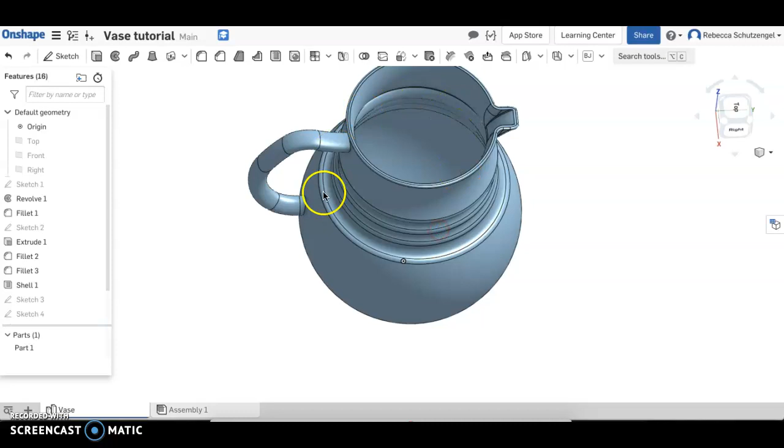In this tutorial, you're going to make the vase that you see on the screen, and that's going to allow you to practice a lot of the Onshape commands you've recently learned. Specifically, we're going to use a revolve command to create the main body of the vase, an extrude to create the spout, a sweep to create the handle, and a shell to make the vase actually hollow the way you'd expect a vase to be. You're also going to learn a new command called delete face.

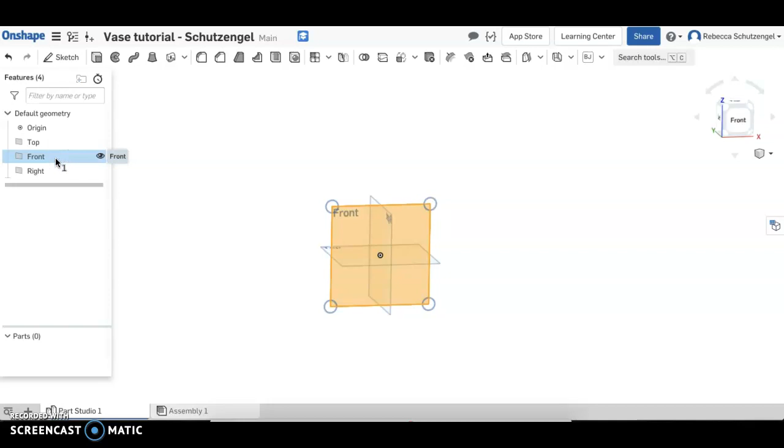So starting from a blank document, notice I named mine Vase Tutorial and then my name, and you should do the same in your document. I'm going to make my first sketch for the main body of the vase on the front plane. If I select front plane before clicking sketch, notice how the sketch plane is already selected as the front plane because that's what was highlighted. And then I'm going to click P on my keyboard to hide all of the planes, and click on the view cube so I'm looking head on at the front plane.

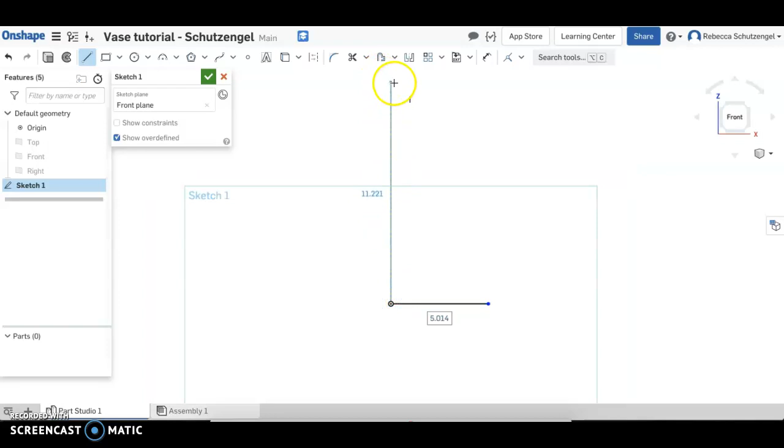When I sketch the outline that I'm going to revolve, I'm only going to sketch half of the vase's shape, because when I revolve that half of the shape 360 degrees around, I get the entire thing. I'm going to start by drawing a few lines, starting lined up horizontally with the origin. I'll draw a horizontal line, then a vertical line, then another horizontal line, making sure each of those constraints snaps as I am drawing the line in.

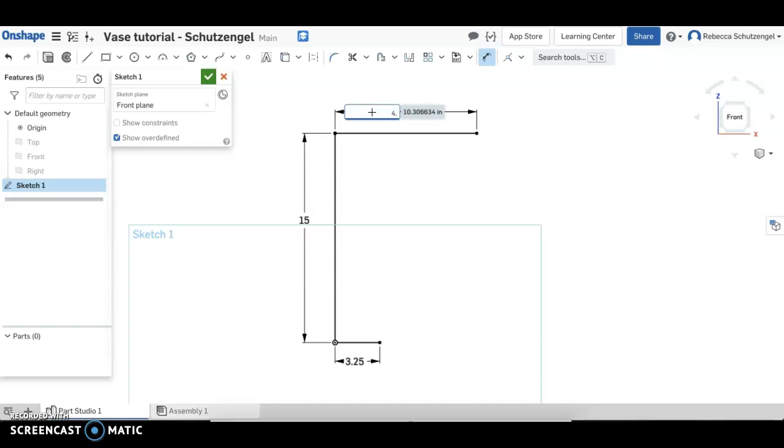And then I'm going to start to put some dimensions in. This vertical dimension is going to be 15. This bottom line is going to be 3.25. And this top line is going to be 4.375. Then to get the rest of the outline of the vase, I'm going to use a lot of 3-point arcs - A is the shortcut on my keyboard.

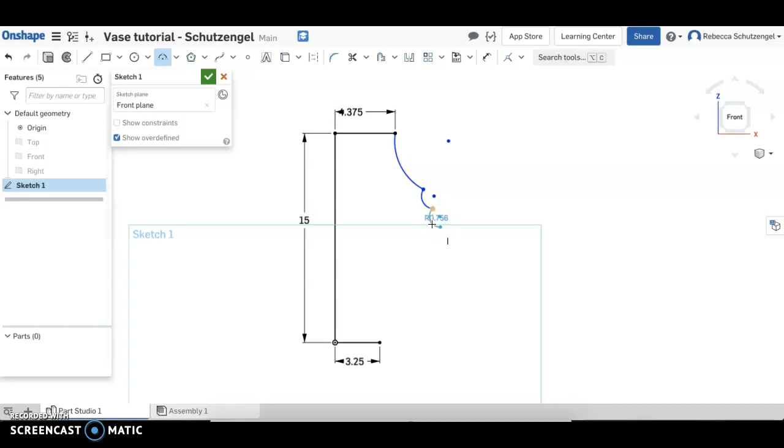At first, I'm just going to very roughly draw those arcs in, sort of vaguely where I want them. Then I'm going to put in a bunch of different constraints and dimensions to get the whole thing to be fully constrained as a sketch.

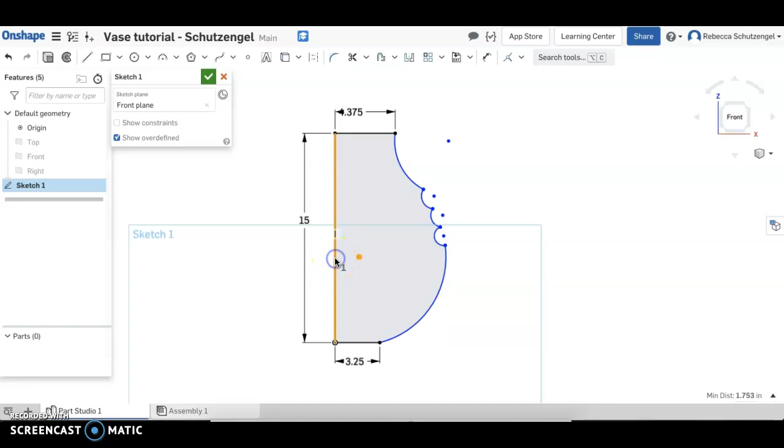Okay, so now I've got those 5 arcs, and now we're going to start with the constraints. The first constraint, this bottom arc right here - this is the center point of that arc, and I want it to be constrained to be coincident with that line, so the center point is on the line. The keyboard shortcut I just used was I for coincident.

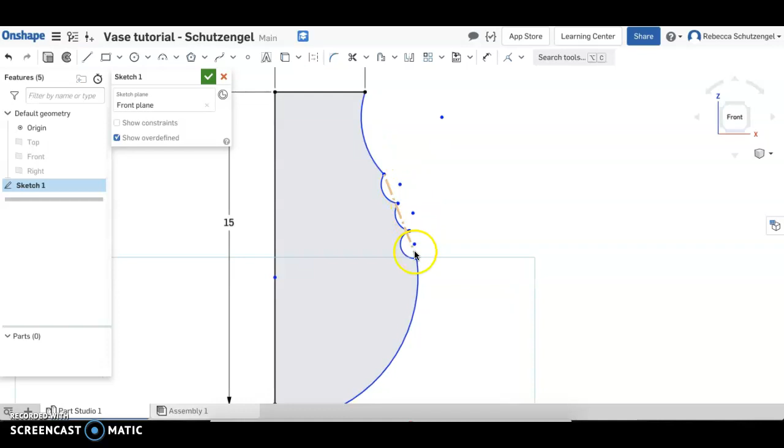Next, I'm going to create a construction line. I can press L on my keyboard to get a line, and then Q to make it a construction line. Then I'm going to draw it from here to here. The reason I want that construction line is that I'm going to make each of these points, which are the centers of the 3 small arcs, to be coincident with that construction line.

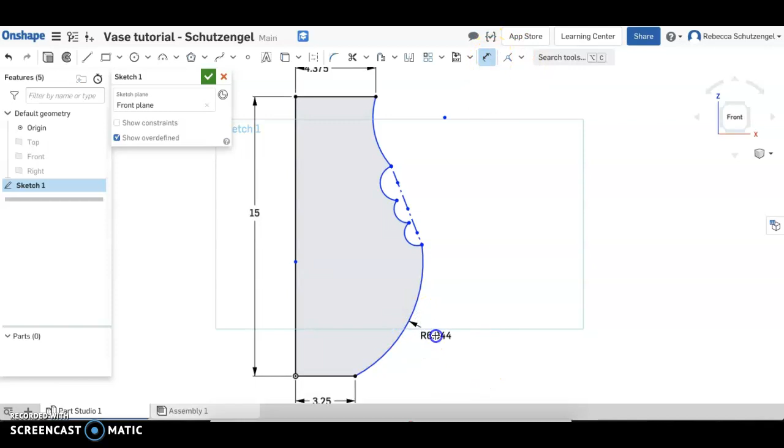Now I'm going to start putting in radii for some of the arcs that I drew as dimensions. Again, D on my keyboard to select the dimension tool. This bottom arc, I want it to be 6.3. This top arc, the radius is going to be 3.4.

Then I'm going to start putting in some lengths as well. I'm going to constrain the heights of a lot of these arcs. So from the top here to where this first arc ends, I want that height to be 3.5.

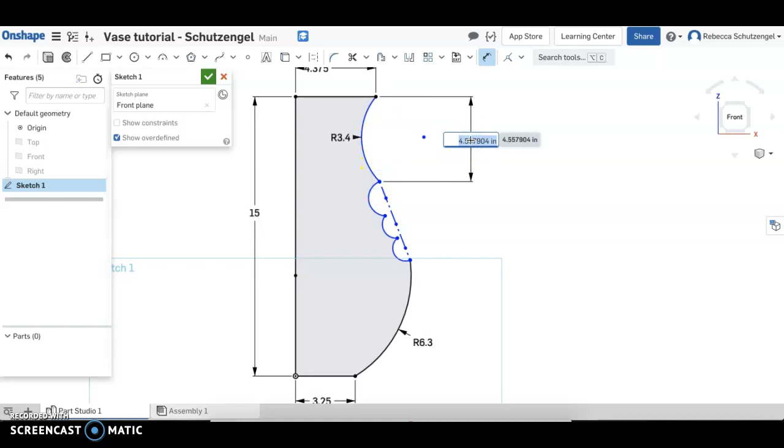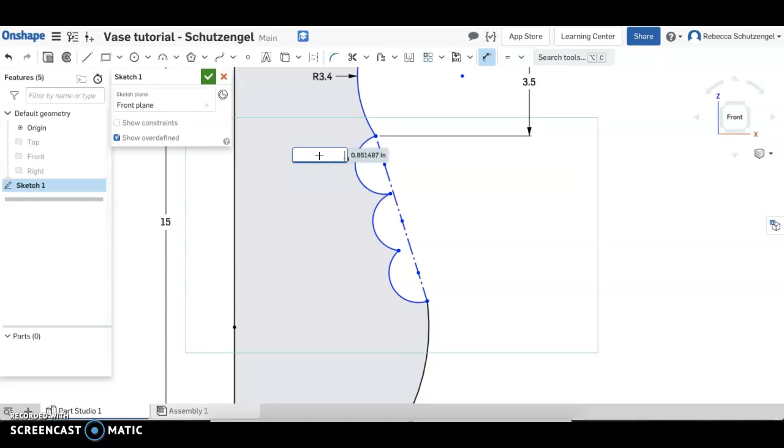Notice these 3 small arcs are now doing some weird things, so I'm going to start to constrain them more as well. I'll click on all 3 arcs, and those 3 arcs I want them to be equal sizes - E on my keyboard to put in the equal constraint. Then I can dimension just one of them, I want it to be 0.5, and that will make all 3 of them 0.5 automatically.

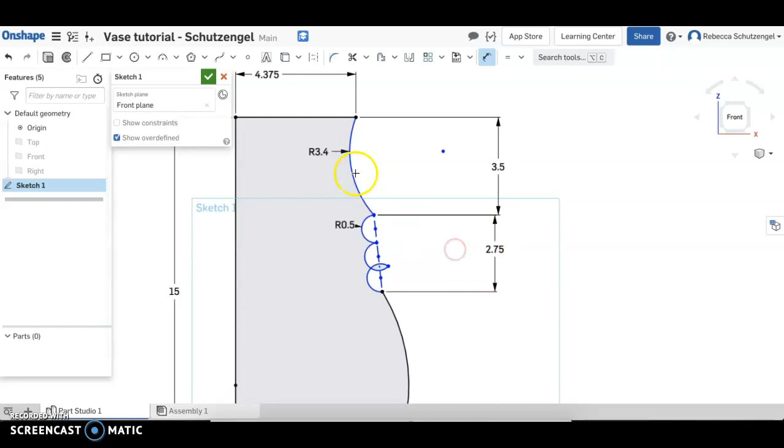Then I'm going to do another length from there to there - that is going to be 2.5. Oh sorry, this is actually going to be 2.75. Then going back to this top arc, this center point for it, I want from the top of the vase to that center point, that height is going to be 1.5, which now makes this arc fully constrained.

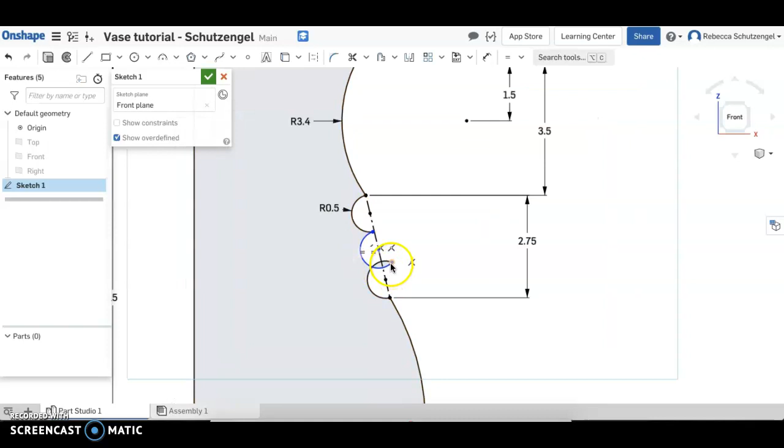The only thing that's not constrained is that small one in the middle there. First, we have this sort of weird overlapping thing happening, so I'm just going to drag the arcs that I have until that is no longer happening. Then I just need one more dimension - I'm going to go from here to here vertically and make that 0.98. Now the entire thing is fully constrained.

My whole sketch is black, as you can see. And here you can see all the dimensions if you still need to put any of them in your own sketch.

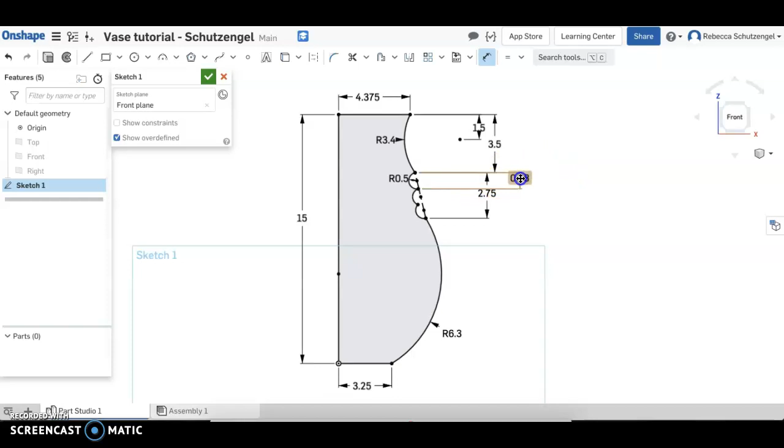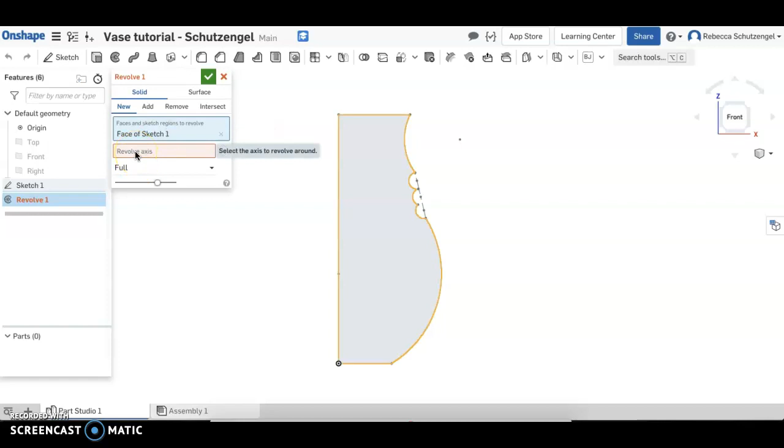Sketch 1 is done, and now I need to revolve it. Just like I could select a plane before I click sketch, I can select a sketch before I click revolve. Notice how because I had the sketch selected, it's already in here as the sketch region to revolve. The only thing I need to select is the revolve axis, so I'm going to click on revolve axis, and I want this shape to rotate around this center line right here. I'll click that axis, and up comes the preview of my revolve.

Looks exactly like I want it to. I'm making a new part, and it is solid, so I'll click check on that revolve. That revolve is the main body of my vase, so I'm going to go ahead and name it that so I can keep track of the different features in my feature tree.

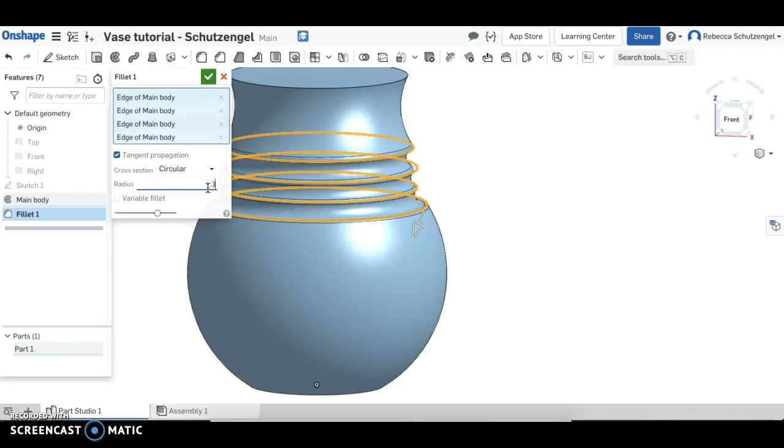Notice how I have some really sharp edges right here. I really don't want that, so I'm going to use the fillet tool to round all of those edges out. I'll select fillet, then click each of these lines where there's a sharp edge, and change the radius to 0.3. Then click check on that fillet, and again rename it to be more descriptive.

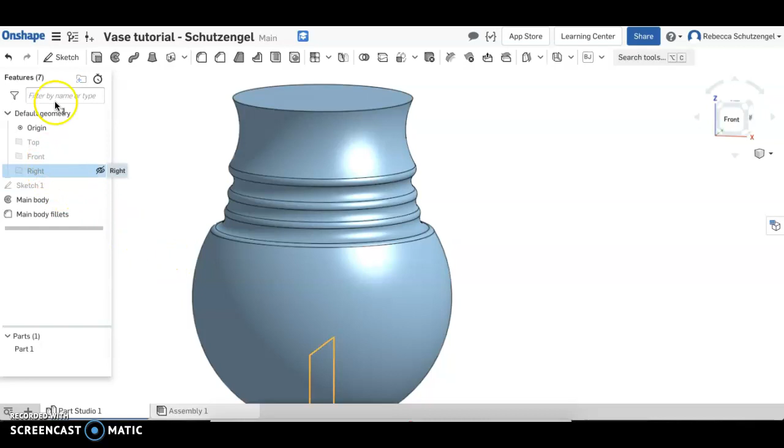Now I'm ready to start making the spout. I'm going to sketch the spout on the right plane and create my sketch, then rotate my view and click on the right side of the view cube. To get the spout to line up with the top of the vase, I'm going to use or project that line, just clicking on the very top here of the revolve that I have, and then the project command to get a line in my new sketch.

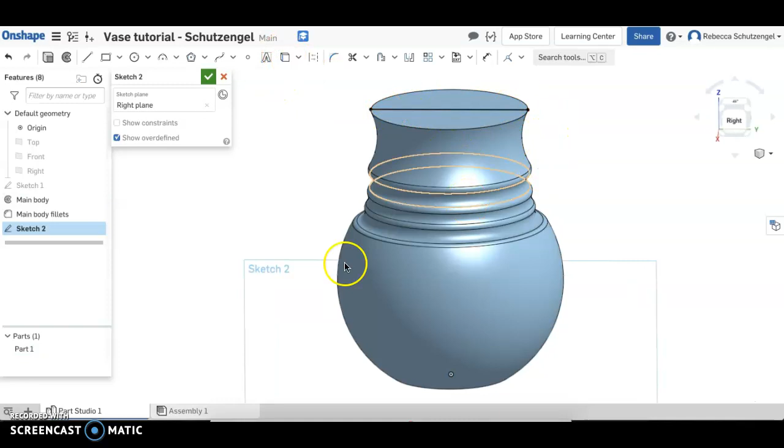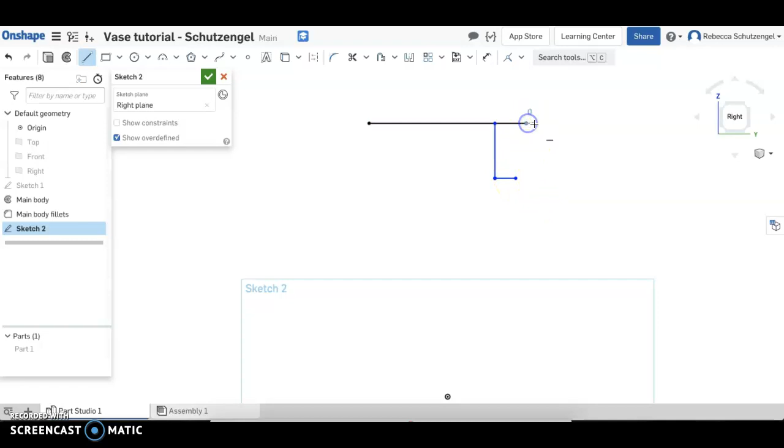Once I have that line, I really don't want to see the rest of my part for now. It's going to make it easier to do the sketch on a blank slate. So I'm going to start drawing the shape of my spout: starting from here, a vertical line down, a horizontal line over, and then another horizontal line extending out past where the edge of the vase is, and then a 3-point arc connecting those two spots, just like that.

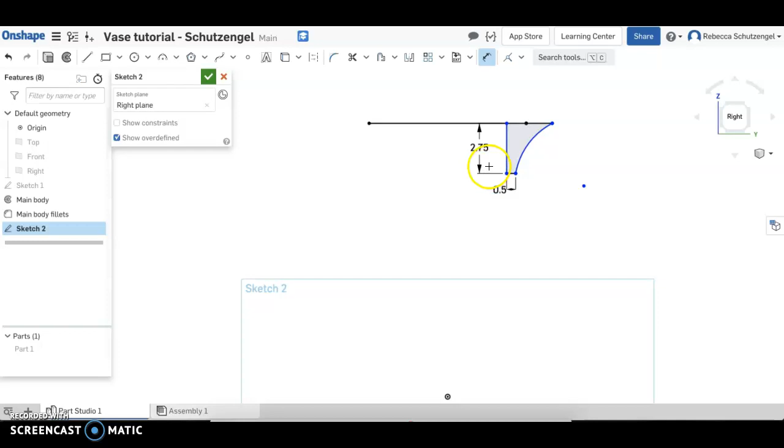Now I just need to add in some dimensions. The height here is going to be 2.75. That dimension right there, the bottom length, is going to be 0.5. From here to here, I'm going to make that 1, and from here to here, I'm going to make that 1.5, and the radius of the arc is going to be 2.741.

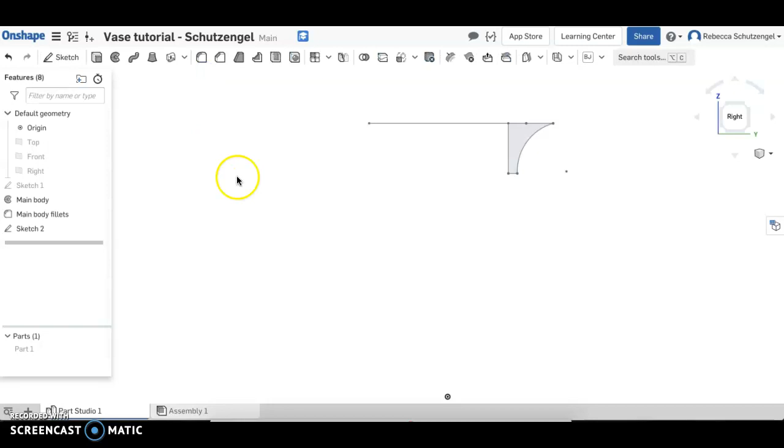Now I have a fully constrained sketch, and now I'd like to be able to see my part again, so you can see the vase and then the spout that's going to be sticking out. I'm going to select my sketch, and because it's already selected, now I'm going to extrude it. You can see the region that I want to extrude is already selected, so it defaults to blind as the end condition for the extrude.

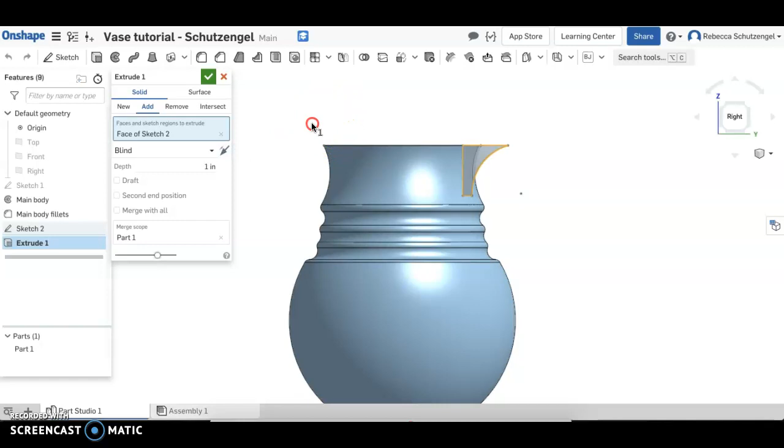But if we look at what that does, if I do a blind extrude, it extrudes in one direction right here, and see how the spout is now really offset, not centered on the vase. So if I want it to be centered, instead of extruding in one direction, I want it to extrude evenly in both directions. So instead of a blind, I'm going to select the symmetric end condition, and now notice how it's extruding halfway in one direction and halfway in the other.

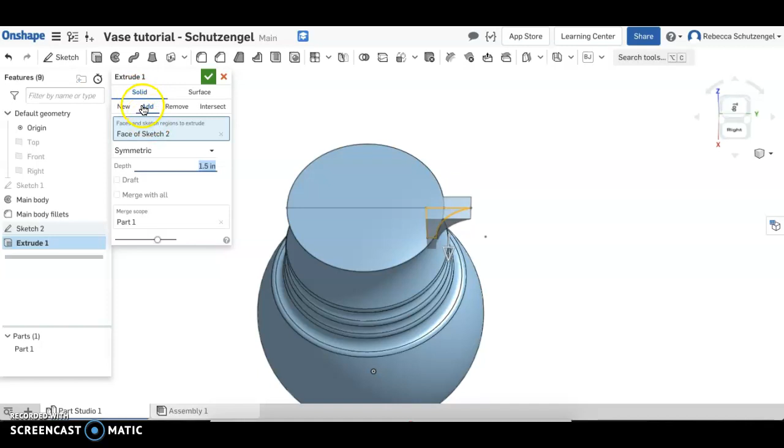I'm going to change the depth to 1.5. The default here is on solid, and it's adding to my existing part, and both of those are what I want, so I'll click check on that.

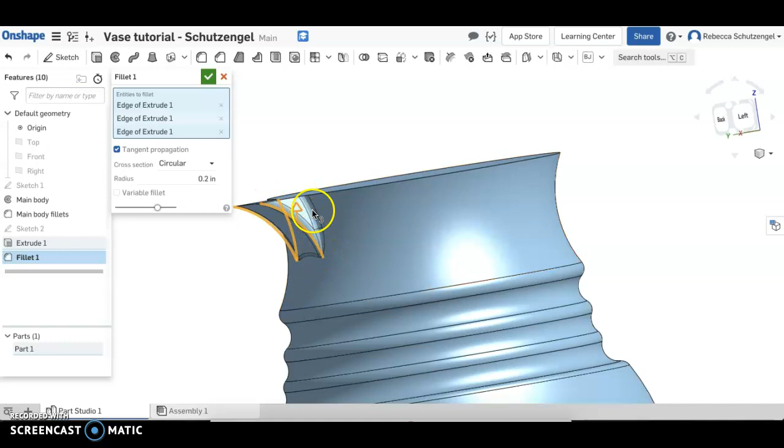Now I have the spout, but it's kind of awkward looking with all of these hard corners at the edges, so I'm also going to use fillets on the spout. I'll click on this edge, and then click on those edges on the other side of the spout as well. Sometimes when you click on one edge, the other edge automatically gets added to the fillet, and that's fine because that's what we want it to select anyway.

I'm going to make the radius 0.2, and I will save those fillets.

Then I want a separate fillet for the top edge right here because I want it to be smaller, so I'm going to make another fillet. I'll click on that edge right there, and notice how it did the entire top of the spout, or the entire top of the vase, which is good—I want that fillet all the way around. I'm going to select the radius to 0.1. Then again, I'm going to start renaming things to be a little more descriptive rather than just saying extrude 1 or fillet 1.

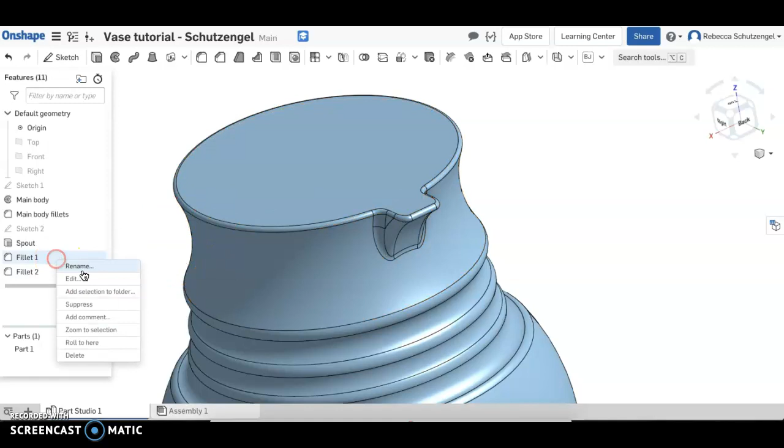Okay, so now I have my vase and my spout, and I want to shell it so that it will actually be hollow like a vase. So I'm going to click on the shell command right here. The faces to remove is going to be this top face. I want that face to be gone.

It's going to be hollow. Notice how at first everything's turning red. It can't make this shell the way I've asked it to. With features like shells and fillets, that'll often happen depending on the thickness or the radius you put in. So if it turns red at first, don't panic.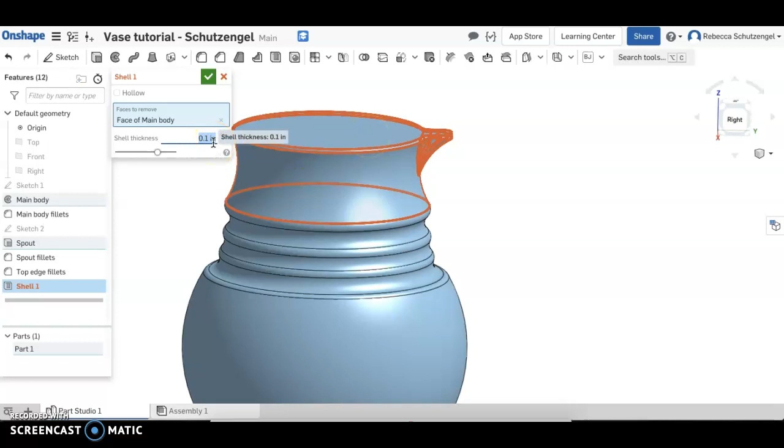Put in your dimensions and then see if that solves the problem or not. So for this shell, I want the thickness to be 0.1 inches. That means the material left is going to be 0.1 inches thick and everything else is going to be cut away. Notice how now the shell doesn't have a problem, it's going to show up just fine. So I'll click check on that feature.

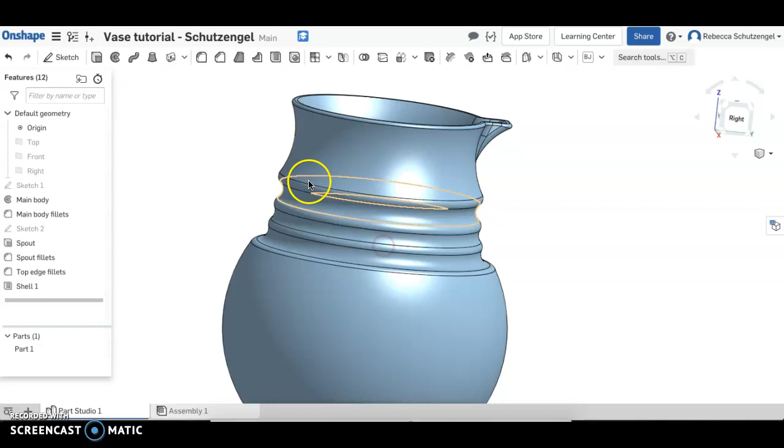And then the last thing I want to add is the handle of my vase. For the handle, I'm going to be using a sweep feature, which means I need to draw two different sketches: one for the cross section, the shape of the handle, and one for the path that the handle is going to follow. For the cross section, I'm going to draw that on the front plane.

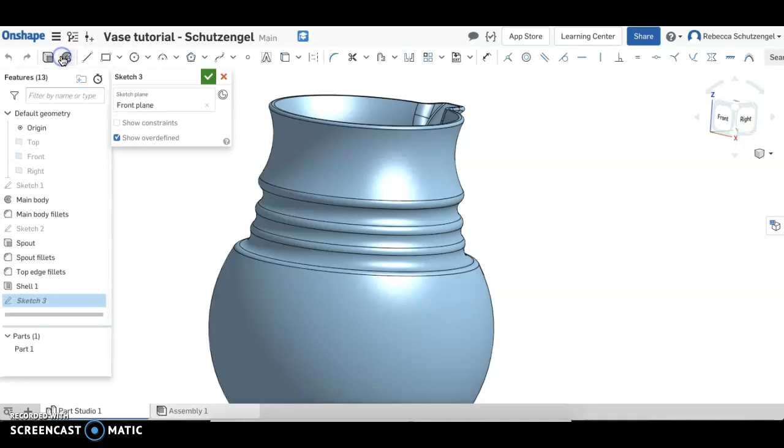So I'm going to put a new sketch on the front plane, and I'm going to be looking head on at the front here. Again, I'm going to click at the very top of my vase, and I'm going to project that onto my sketch. And then I'm going to hide the vase so I can just see the space I'm sketching on.

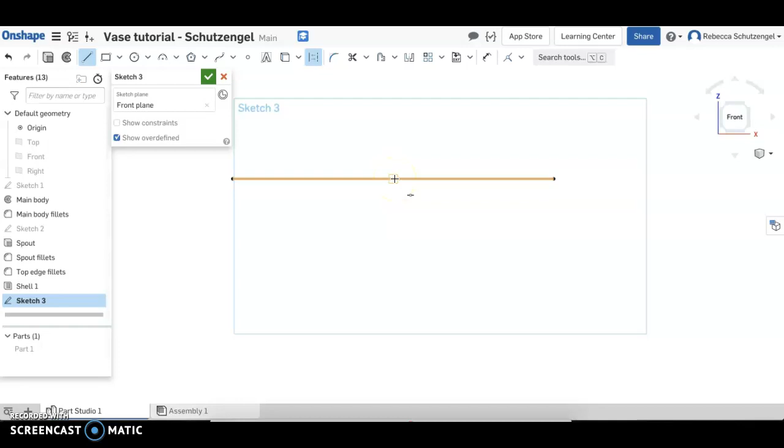I'm going to end up using a lot of construction lines for this. So I'm going to start by finding the midpoint of this existing line. And I'm going to draw a construction line vertically down. Then I'm going to draw two more construction lines horizontal.

At first they're going to be not constrained at all, but then I'm going to add in dimensions that do those constraints. I'm also going to get the midpoint of this construction line right here, and I'm going to find this other line's midpoint as well. I'm going to force those midpoints to be on the vertical construction line so everything is centered together.

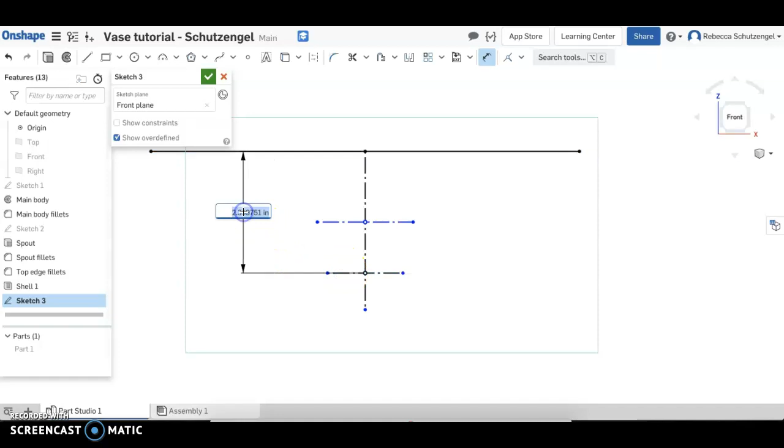And then several dimensions right here. Now notice how all of this is constrained.

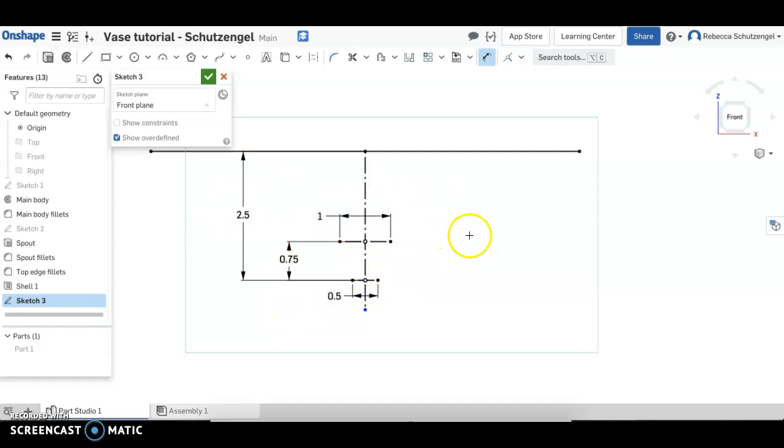And then I'm going to use a spline to draw the shape that I want, so the spline tool over here. I'm going to be clicking on each of the end points of these short construction lines that I've drawn, and I'm just going to go all the way around, and my spline forms a full closed shape. Because it's a closed shape, it actually ends up fully constrained just the way it is.

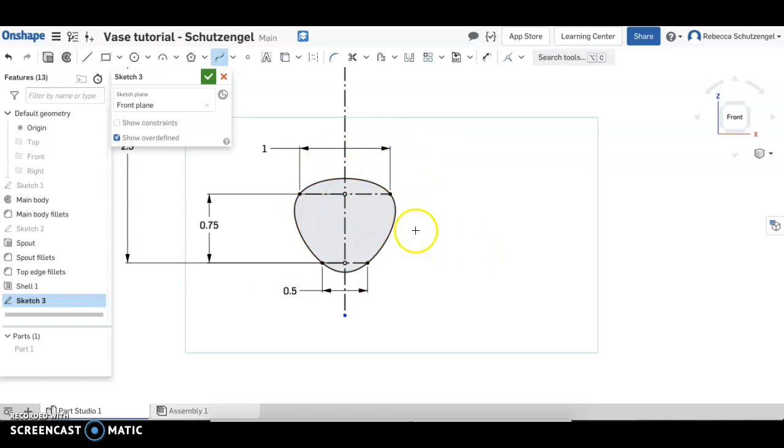So that is the cross section for the handle of my vase. You can see it there drawn in the center of the vase. And now I need to draw the path that it's going to follow when it sweeps. I've got my cross section here, and the handle itself is going to come out of the vase, so I have to draw that path that it's going to follow.

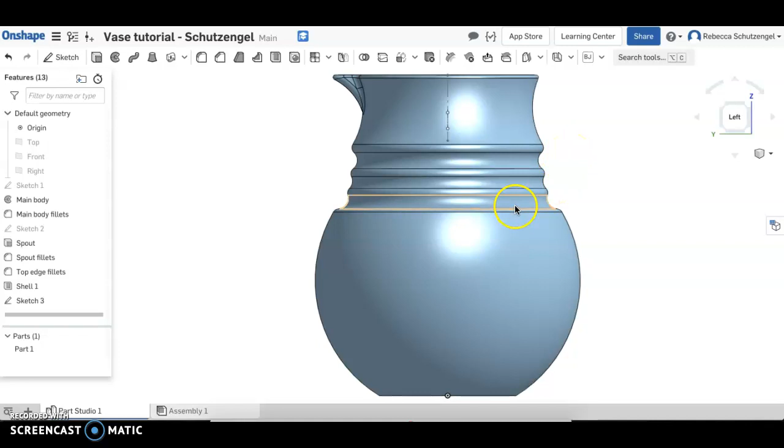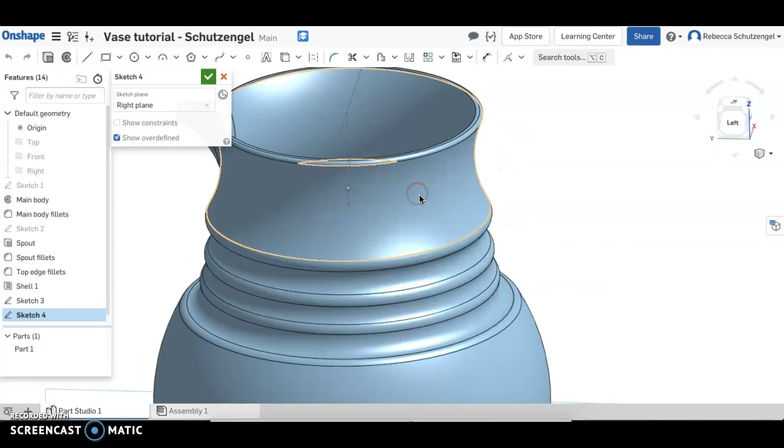I'm going to draw that on the right plane right here. Make a new sketch, and notice how I'm on the left side of the view cube here. I'm going to draw here my path on the opposite side of where the spout of my vase is. The only thing I need to use is I want to make sure my path lines up with this cross section that I've sketched. So I'm going to take one of these dots from my old sketch and project it onto this next sketch.

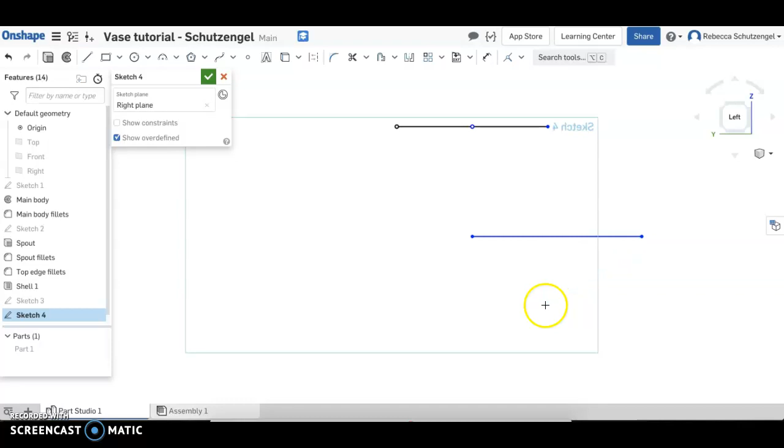And then I'm going to hide everything else, so I'm just starting from that dot right there, looking head on from the left perspective. I'm going to draw one horizontal line, and then I'm going to draw a second horizontal line below it that is lined up with the midpoint. I'm hovering over the midpoint here and then going down, so I'm vertically lined up with that, and then drawing another horizontal line. Then I'm going to put some dimensions on these lines.